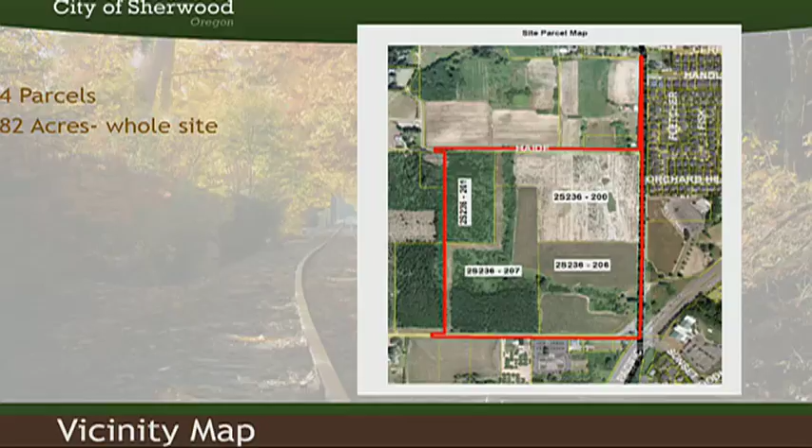Can you hear me okay? Sorry, we were discussing this, and other people may be discussing this as well, especially those at home. The projector is not working. The audience can see the PowerPoint presentation on the screen in front of them, and the commissioners can see it on the screens right in front of them, so it's really just us that are not seeing it, but the Planning Commission is seeing the presentation, even though the projector isn't projecting.

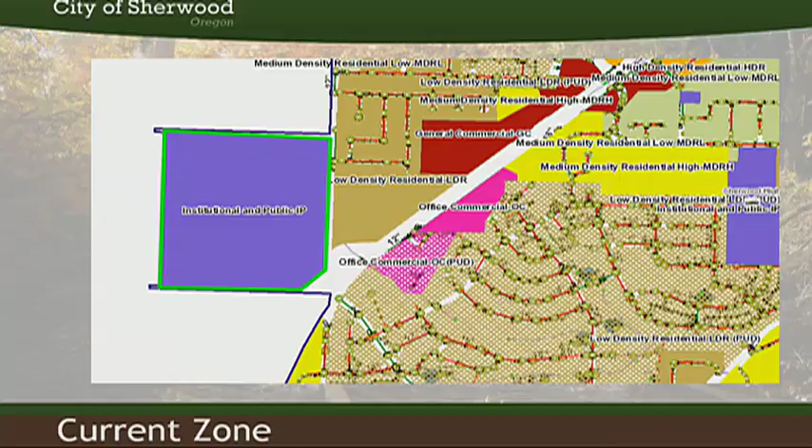The project site currently has zoning of institutional and public.

Each time we've come before the commission with different pieces of the high school, we've tried to show the larger picture and put all the different pieces together so you can see where this particular project fits in. It's particularly pertinent with two new planning commissioners here tonight.

Let me walk through those real quickly. The very first step was the expansion of the urban growth boundary around the outside of the city, which happened via Metro in mid-2017. The second step was to apply comprehensive plan land use to the site and policies, to pre-apply zoning, and to have a Title 11 Metro concept plan applied to the property. That happened already in late 2017.

The third step was the annexation to actually bring the project into the city. At that point, zoning was actually applied to the property, and that happened in early 2018, earlier this year. The last step is, and has always been, the site plan and a conditional use permit for the project. When the applicant came forward with the applications, they added a variance to that, but it's essentially what we have before us tonight. So let's dig in a little bit more with the first item.

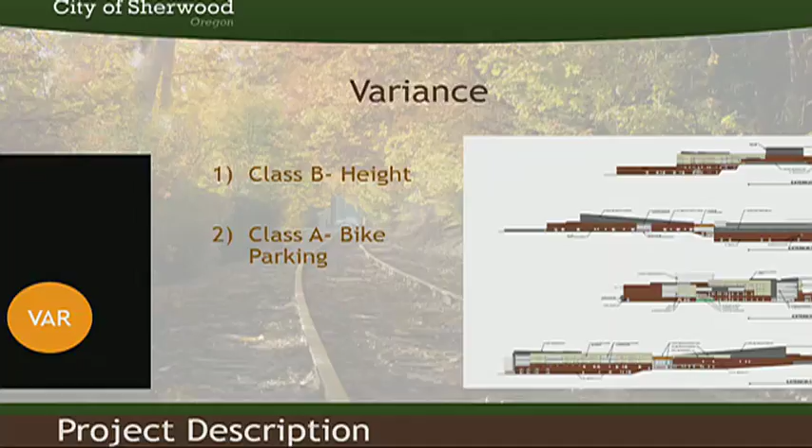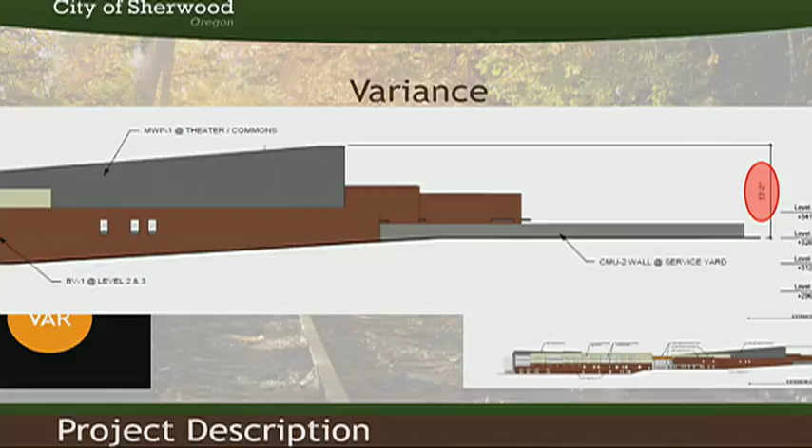The variance is twofold here tonight. The applicant is proposing a Class B variance for height and a Class A variance for bike parking. Specifically for the height, you can see on this slide that one of the structures exceeds the 50-foot height limit for the institutional and public zone by 3 feet. We'll talk more about these variances in a moment.

This isn't the right slide. I apologize, I'm experiencing a small technical difficulty. I think I grabbed the wrong presentation. Want me to run upstairs and grab the correct one? Okay, sorry about that. Did you want to start with the applicant's presentation then? No, I'll be right back. Sorry, we can pause for a moment.

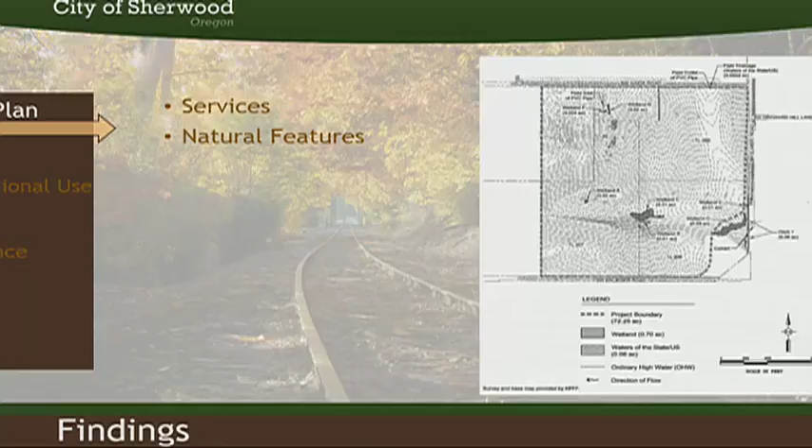The code requires that a transportation impact analysis be provided for the project. The applicant has provided one of those, and that was in the packet distributed to the Commission previously. All the proposed mitigation measures from that transportation study have been included in the project as conditions of approval.

The code requires that specific design features be used, or it allows the applicant to come forward using the Planning Commission as a design review board, and that's exactly what the applicant is intending to do. Rather than subscribe to a laundry list of prescriptive items from our ordinance, they've elected to come before you with the design features, so those are going to be to the satisfaction of the Commission here tonight.

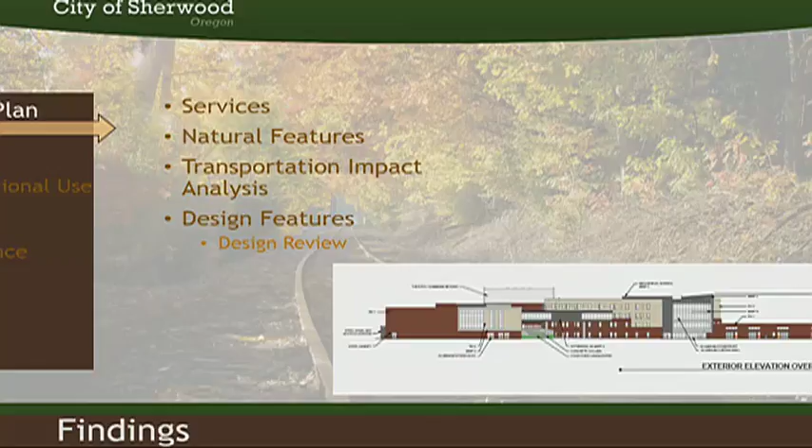The conditional use criterion includes the same requirement that services be available, so we've already addressed that. It requires that the zoning standards be complied with. In this case, the zoning standards for the institutional and public zone are all adhered to for this particular project.

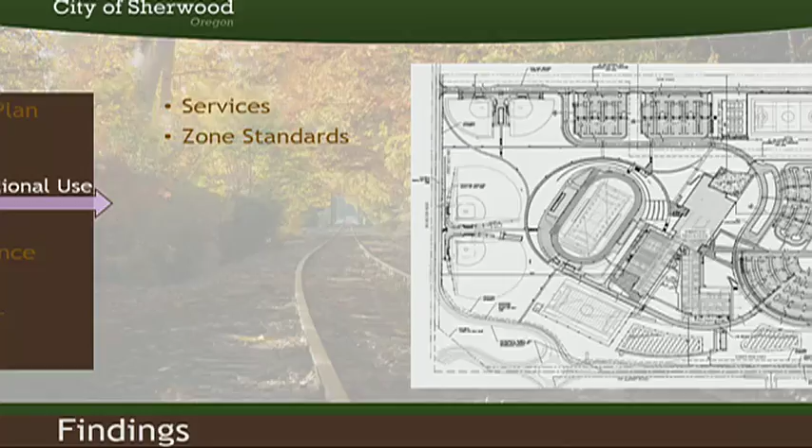The code requires that the project meet a need for the community and that they meet the requirements of the comprehensive plan. Because this project came in before, just a few months ago, with comprehensive plan changes and a Title 11 concept plan, those changes were specifically tailored for this high school.

The code also requires that there be no adverse impacts to the surrounding community. In this case, that's generally traffic. With mitigation from the transportation impact analysis and through the basic design of the school, this criterion is met.

Moving on to the variance, the Class A and Class B variances have different criteria. So we'll start with the Class B variance. A Class B variance must be based on an issue brought on by the lot, by the property itself. In this case, the Class B variance is for the height.

Based on the topography of the site, the applicant has designed a structure that is designed to basically hug the site and contour to the land. That's a requirement that comes from a lot of other sections of the code. So breaking that by 3 feet, we find that's consistent and meets the required criteria because it's based on the property itself.

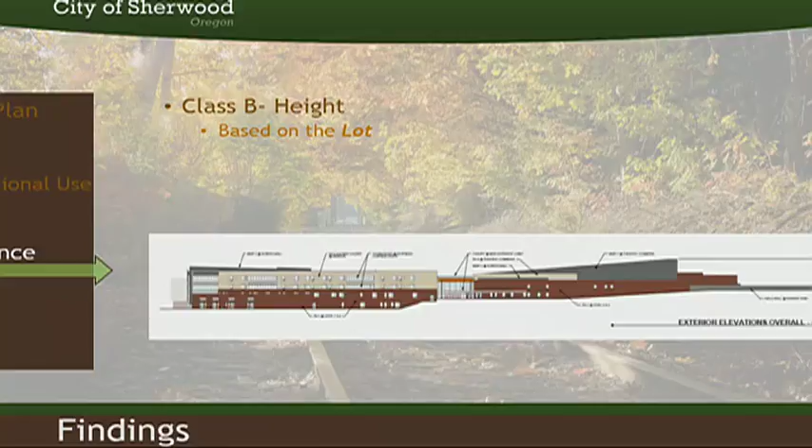The code also requires, however, that the variance be for 3 or fewer parcels. As was previously pointed out, this project has 4 parcels. The applicant was previously entertaining the idea of merging all these parcels into one, so we've added a condition of approval here that they have to do that in order to meet this criteria.

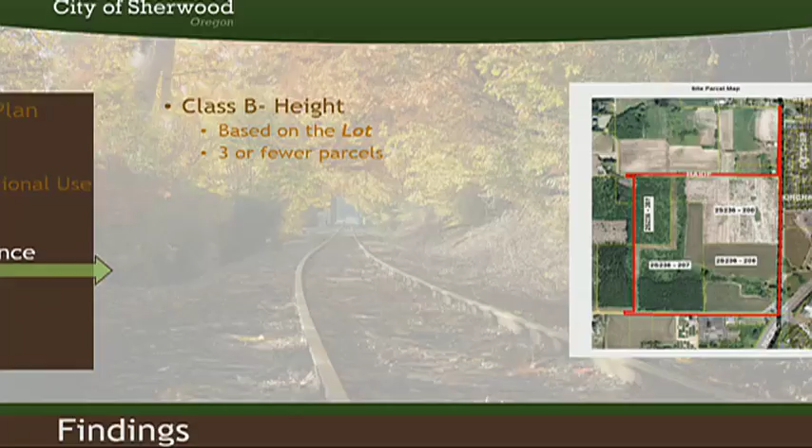The code also requires that the variance have minimal impacts, that's the actual item that has been varied have minimal impacts. In this case, the specific place where the height breaks the 50-foot height limit is located in the middle of the project, so there won't be any adverse impacts to anybody surrounding the project site based on that variance.

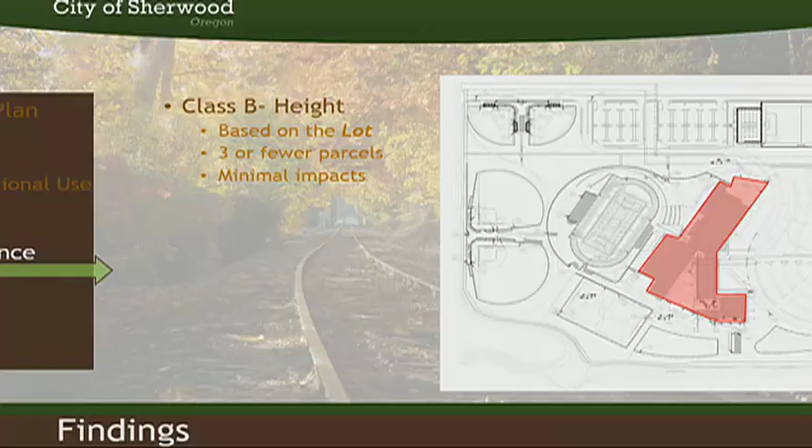The Class A variance is requesting a 70% reduction in the required bike parking. Staff at this point does not support the reduction in bike parking because the proposed change can't meet the required criteria. We've added conditions of approval that require all required 268 bike spaces, including the 80 covered bike spaces, to be added to the plan to assure consistency with this provision of the code.

More specifically, the code requires that the variance not be detrimental to the purposes of the code, and in staff's interpretation, the purpose of the bike code section is to make sure you have other options besides just cars. Reducing the amount of bike spaces obviously reduces the intent of that section of the code because there's less bike spaces to be had. So we feel it is detrimental to the purposes of the code.

Additionally, the variance must be based on a hardship brought on by the lot or the property or the land - topography, a stream going through the middle, rock outcroppings, something like that. Basically, it's designed as a feature of the land that is creating the problem.

In this case, the applicant has indicated that the location of the site is the hardship, and the location, according to staff's interpretation, isn't necessarily a feature of the land and therefore can't be used to satisfy the criteria for a variance. The narrative additionally argues that primarily the code requirement is excessive, and staff feels that if the code is excessive in that realm, which it may be, the appropriate way to address that would be to fix the code. You can't address that through a variance because the variance is rooted in the land itself, and the discrepancy or excessive requirements of our ordinance don't come from the land - that's coming from the ordinance - and therefore it can't meet this criteria.

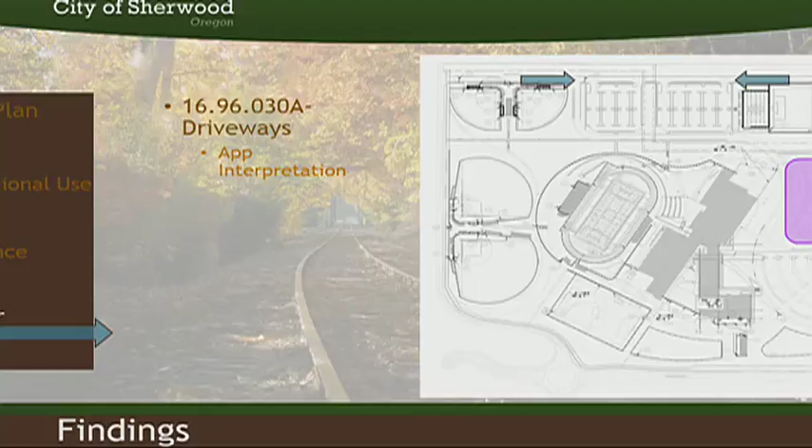Now, the applicants have interpreted this section of the ordinance differently from staff. The applicants have interpreted that the project, if it has more than 50 parking spaces, has to have more than one point of access, and in that case it meets the requirement in spades because there are several points of access to the project site.

Staff has interpreted this a little differently—that each parking lot over 50 spaces requires 2 points of access. If that's the case, the staff parking lot only features 1 point of access.

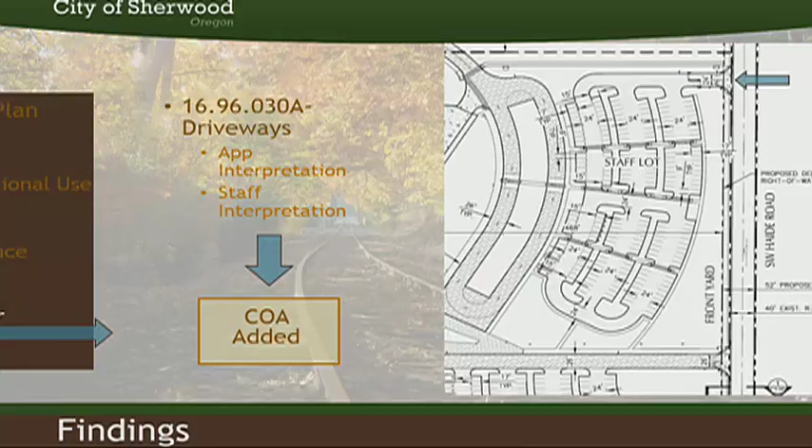So to address this, we've added a condition of approval saying that parking lot has to be redesigned to include a secondary point of access when they come in for the final site plan. If the Planning Commission should elect to agree with the applicant's point of view, we can simply drop the condition of approval, and then that criteria is met.

Section 16.10.620 includes a litany of transportation standards and requirements. We're not going to go through all those individually tonight because the transportation impact analysis addressed those standards in spades, and the applicant's team has an entire presentation addressing transportation and traffic, so we're not going to double up on their efforts. But I do want to note that in staff's opinion, this project meets all of those standards and criteria.

Last, the code requires street trees, and this project is being constructed through a fairly complicated and elaborate structure of intergovernmental agreements—the applicants will be building some streets, the county will be building other streets, the city might be doing some of the improvements also.

So we wanted to clarify in a condition of approval that it's still the applicant's responsibility to ensure that all the required street trees are built before the project is open, regardless of who builds them or how they go in.

So with that, staff recommends approval of the project shy of the variance we discussed previously, subject to the conditions of approval. Before I leave my presentation, we handed out a memo to the Planning Commission, and there are extra copies for any member of the audience at the back of the room.

We've continued to work with the applicant after release of the staff report to address some of their concerns regarding the timing of some conditions of approval, specifically related to grading. So we're proposing some clarifications and small modifications to a number of conditions of approval tonight to help address those timing needs.

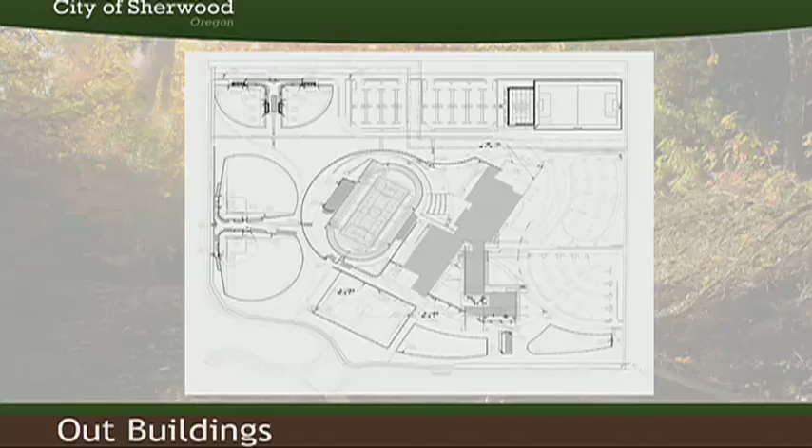How big of a barrier is between the two parking lots? Do you know? I don't know. Would an emergency ingress and egress be allowed? Because I assume you want two, so emergency vehicles can cut across if there's a need for that, in case one's blocked. Sure, well the code doesn't get that specific. It just says that if you're over 50 spaces, two points of access are required. That's all it says.

So we were just putting the burden back on the applicant to design how they would meet that. Okay, so potentially they could come in and clarify that the secondary ingress and egress on the staff parking lot could be limited to an emergency access using the bus turnaround, and that would be acceptable if the condition allowed it. I would think so. Those are the two quick points I had.

And if I may, on the variance and the location—just as a reminder, this is now surrounded by urban reserve, and so it certainly is not anticipated that over the life of Sherwood it will always be rural. There will likely be, over time, neighborhoods and developments around it.

Well, that sort of goes to the other issue—you keep referring to the Sherwood West concept plan, but didn't the city council just say we don't want to do that?

No. There's the Sherwood West preliminary concept plan that exists, it's valid. What council recently said they didn't want to proceed with is asking Metro to add a portion of that into the urban growth boundary in this current round.

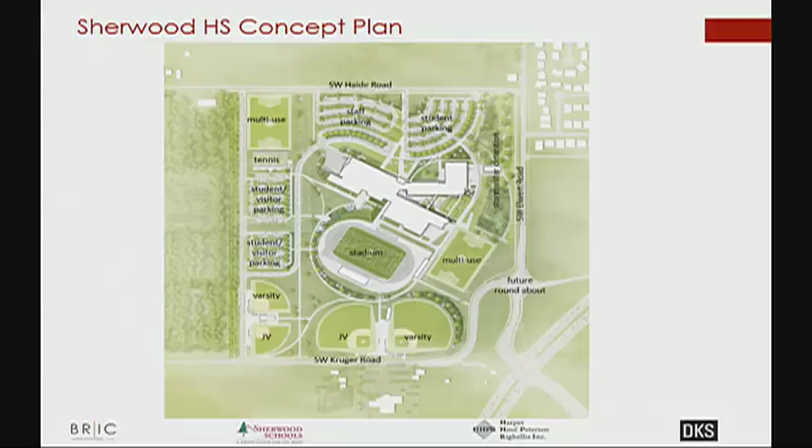The other elements you see in front of you, as Matt also pointed out, we have 4 parking lots. We interpret the code as essentially asking us to look at on-site circulation. It never specifically says each driveway has to have that, so we have a number of on-site access points to the parking lots. Commissioner Cottle, the statement you made is exactly right.

The core tenet of our site development in terms of on-site circulation is to separate bus circulation from vehicular circulation. The buses enter on Kruger and take their own dedicated lane for a bus drop-off around the front of the school, isolated from a staff parking lot to the north and a student parking lot to the east, with parent pickup and drop-off, plus two separate student parking lots and visitor parking lots on the western side of the site.

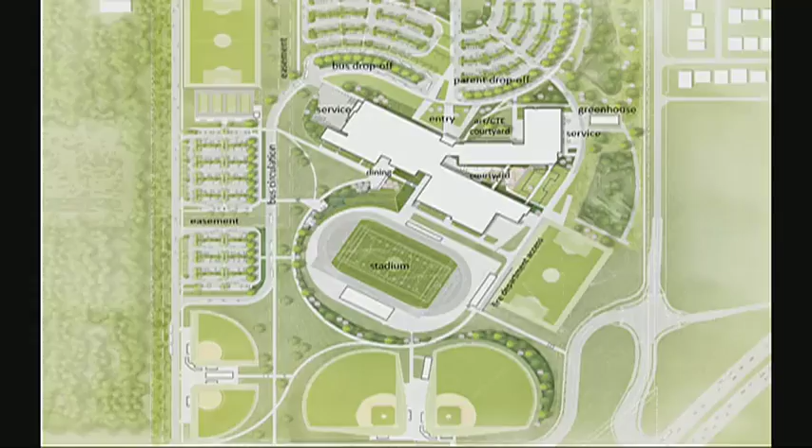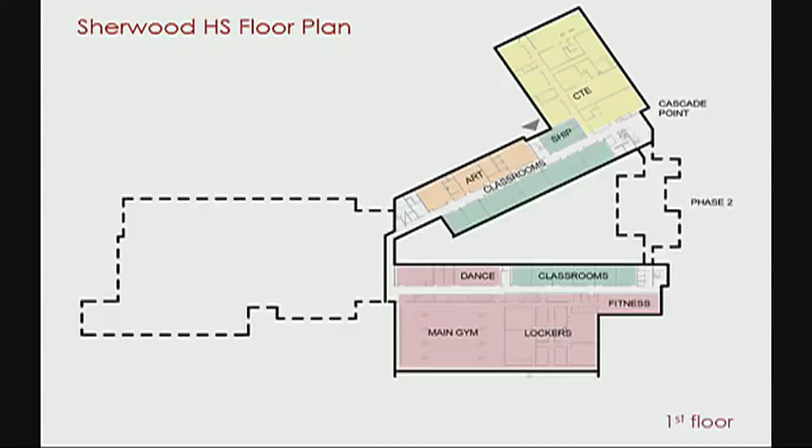You see throughout the site a series of site features. I won't go through the building in great specificity in the interest of time, but it's a 4-story building. We always like to start on the 2nd story because that's where you enter the site, at the main lobby, and you can see in dashes the areas of the site above where you are. Then you go down to the lower level, which houses mostly the athletics and career technical education spaces.

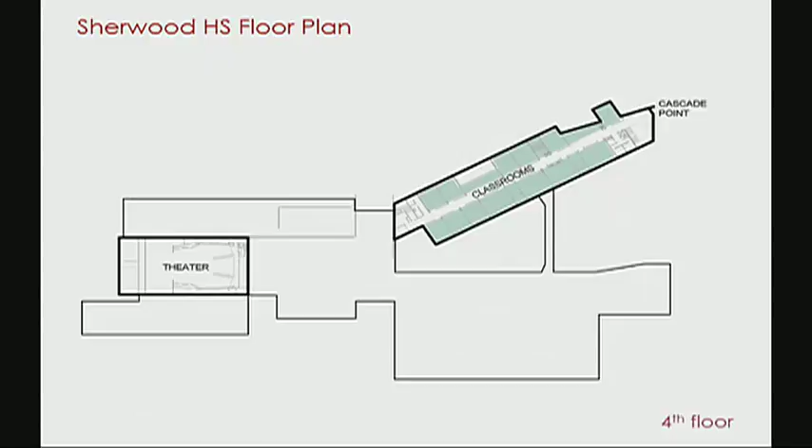Bypassing the 3rd floor up to the 4th floor, you start to see where the common spaces and theater spaces take the top part of the site. Really the only portion of the site that maintains its footprint from the 1st floor to the 4th floor is the classroom wing that culminates at Cascade Point at the northeast corner of the building.

Matt did a great job walking you through the exterior elevations. Our purpose tonight is to come before you for a design review of a building we think is in keeping with the character of the Sherwood community. One comment we heard early on, both internal to the district and from the community, is an interest in making this feel as residential in scale as a building of 342,000 square feet could be.

In contrast to more urban experiences where the building is right up against the property line and you go from a sidewalk to 4 stories tall, we made an effort to move the building back as far as we could and have it hug its way up the site. You start to see materials indicative of the Pacific Northwest, masonry and wood primarily, and an abundance of glazing to allow natural light into the building.

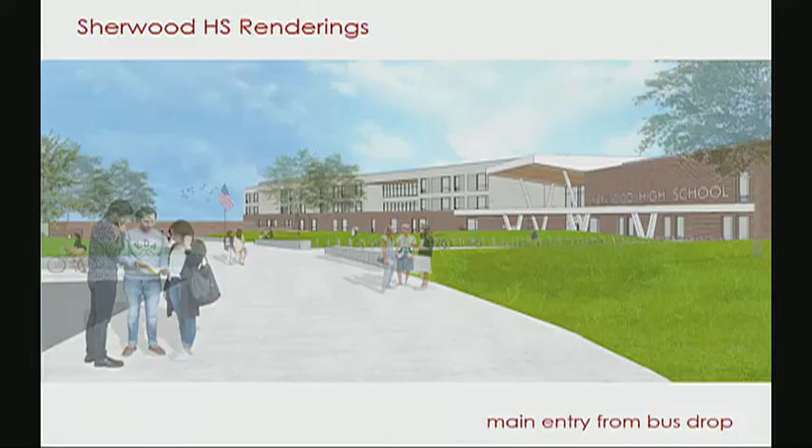The rendering in front of you is the main entrance coming from that standalone bus drop. As you work your way closer to the main entry, you start to see those elements again, the masonry and the wood, that greet you as you walk through the front doors.

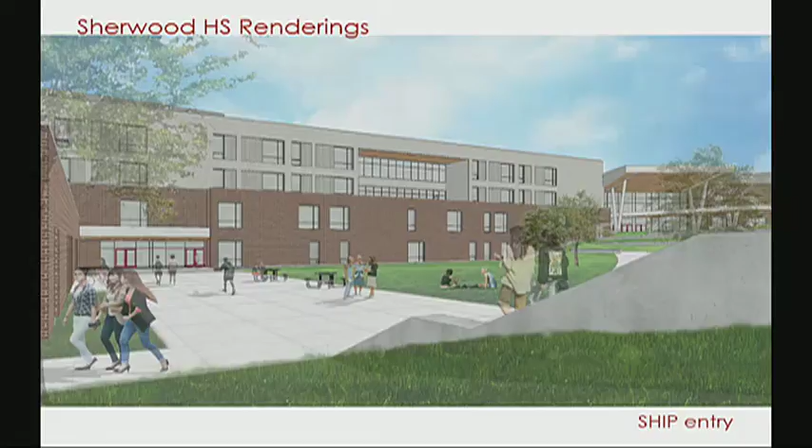Working your way further east, you start to see that grade change. The entry we were just talking about is on the right-hand side of this rendering, and it's about 15 feet above the entry level here at the lowest part of the site at the first floor elevation.

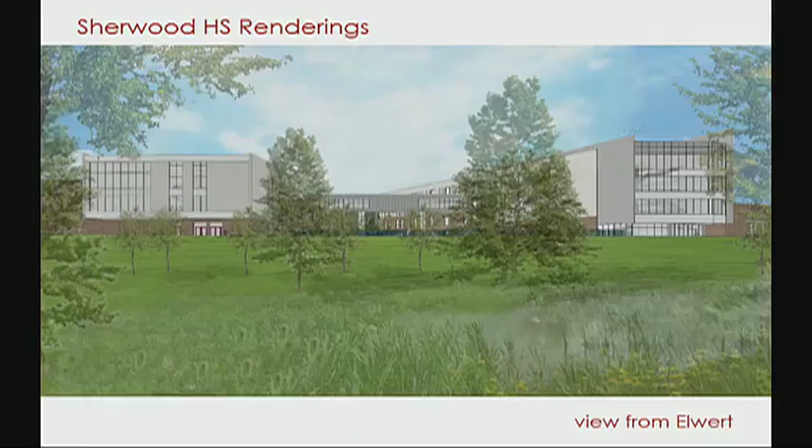This view would be from within the site, basically from within the stormwater detention features we're required to have, looking back towards the library on the left side of the site and the classroom wing on the right, with a view through that corridor that links to the courtyard with a sky bridge connecting the building at the third floor. Moving further into that courtyard, you start to see again that the character of the materials is consistent throughout the building, trying to break up the massing so you're never seeing the same material go all 4 stories.

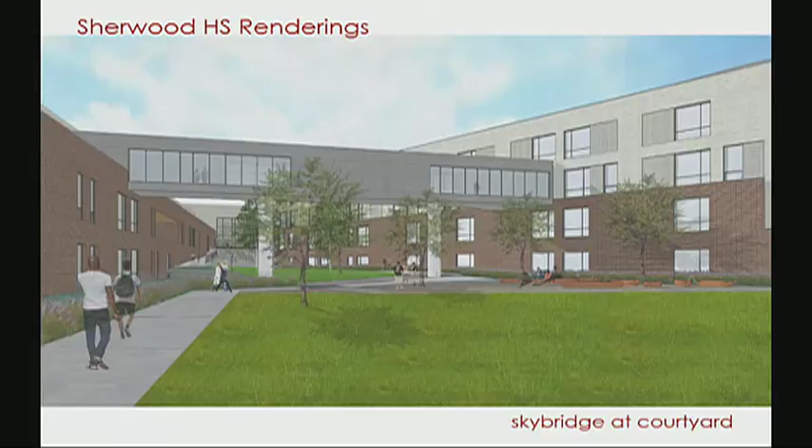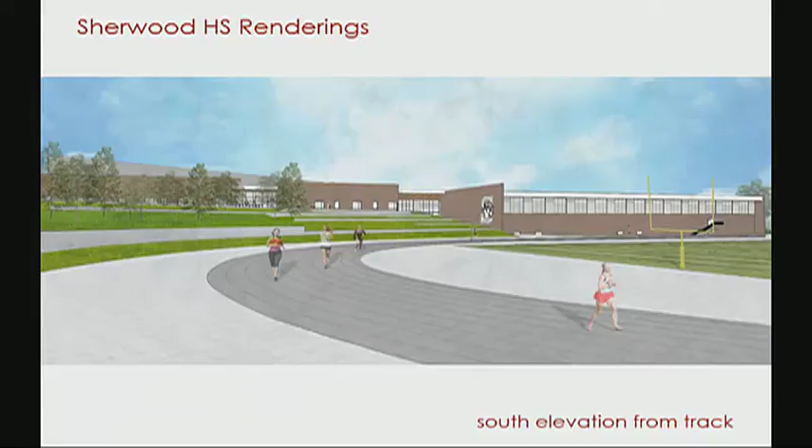Finally, looking at the south elevation from the track in the stadium, trying to get a picture of what that performing arts center, which you're seeing in the background on the left-hand side of the slide, and the gymnasium on the right-hand side of the slide.

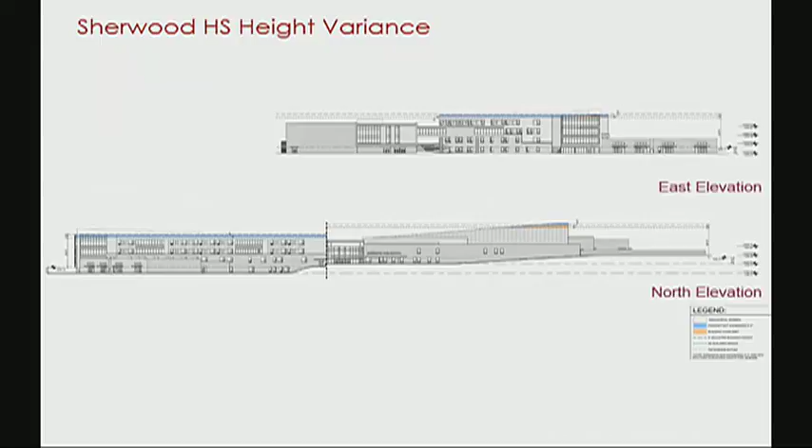So I wanted to talk about the height variance. These are elevations that we provided as part of the packet that are incredibly hard to read at the scale, but really what we're trying to indicate is by color both areas where we have mechanical screens, which don't count against the height variance, and then areas in orange where you can see we do exceed the requirements, but certainly well under, I think it's the 5% or 10% that is the limit for a type B variance. You can see that on the rest of those elevations as well.

And then looking across Elwert, which is where we are closest to our neighbors, we're still over 360 feet away from our neighbors in that case. So we think that while a building of this scale is difficult to mask relative to a site like this, by allowing it to step its way up the hill, we've done as good a job of that as the site would allow us to do.

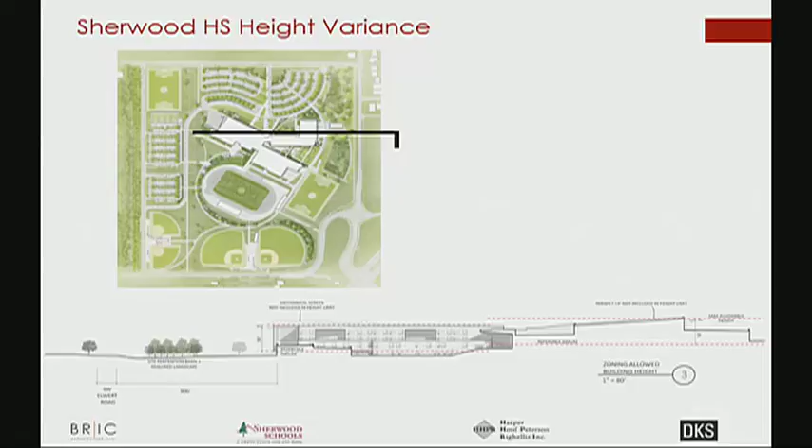So with that, I'm going to hand it over to Scott Mansur from DKS to talk about the traffic.

Thank you, Karina. Again, I'm Scott Mansur with DKS Associates. I'm just going to tilt this a little bit.

I'm going to walk you through the transportation impact study that we prepared for the school district. This is actually the third study we've prepared for this site. As Brad talked about earlier, we originally had a traffic study done for the UGB expansion. Then we had a second study as part of the zone change and comprehensive plan change, which had conditions of approval for traffic that I'll talk about later. And now this is our traffic impact study for the site development.

Just to show you the magnitude of the traffic study, we analyzed 19 intersections, many of which were under ODOT, Washington County, and City of Sherwood jurisdiction. We had 3 public agencies that we coordinated through this process that reviewed our traffic analysis and provided feedback throughout: ODOT, Washington County, and the City of Sherwood.

We've had a lot of coordination meetings through this process—probably a dozen meetings throughout all 3 studies. For our site development, the 3 most recent were back in March, April, and May, where we presented our findings, received feedback, made revisions, and came up with a set of transportation solutions that all agencies and the school district were able to agree upon. Many of the things we coordinated were background traffic growth assumptions, trip generation assumptions for all the different school modifications and changes through the bond and the study area, and many more.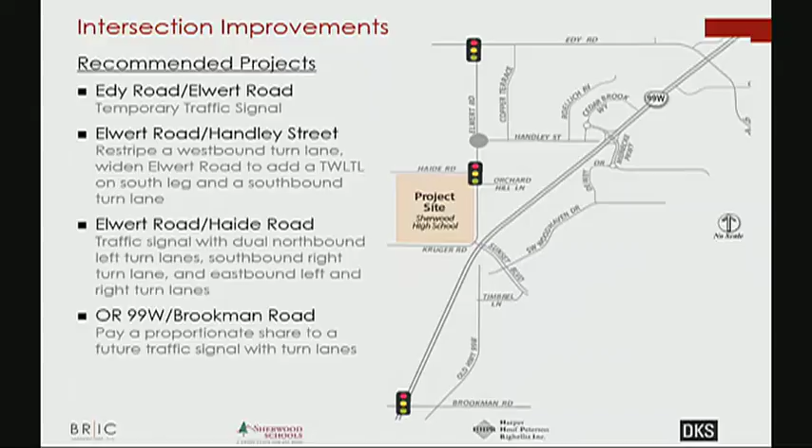This figure shows some of these improvements, including the temporary traffic signal at Edy Elwert. We're also proposing a southbound left turn lane on Elwert at Handley, and a left turn lane exiting Handley to improve capacity, so widening at that location, as well as at the Haide Elwert intersection, with dual northbound lefts from Elwert to serve the morning peak of about 500 students who want to turn left there, as well as other signal and transportation improvements for pedestrians and bikes.

And this is showing our two TPR conditions, which were part of our transportation planning rule: widening Elwert to 4 lanes and building a multi-lane roundabout at this location. Something that isn't shown is the city is also planning to mirror the improvements for 5 lanes on the Sunset approach to that signal.

As well as you can see, there are pedestrian improvements on 99, some pedestrian medians, and dual left turn lanes on the highway coming northbound. And this is my final slide.

Just to go through, these are all the mitigations being recommended, what the improvement was identified as, whether they are frontage improvements, part of the Safe Routes to School plan, required by the land use plan for operations, or the TPR study. And as you can see, across all the studies, the district is recommending about $12.5 million in transportation improvements to be constructed.

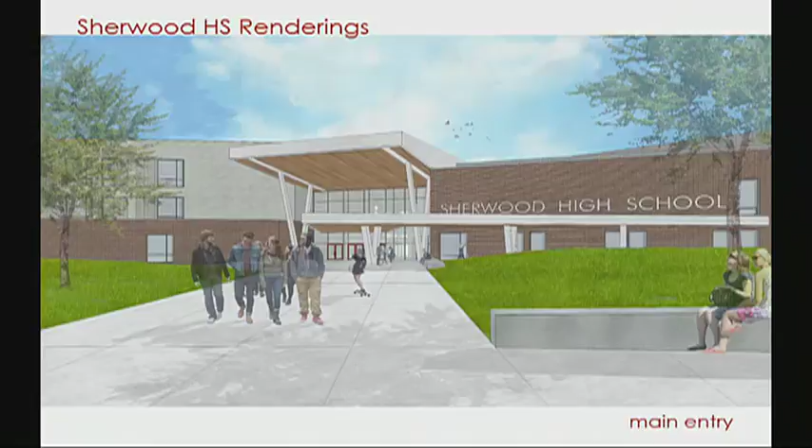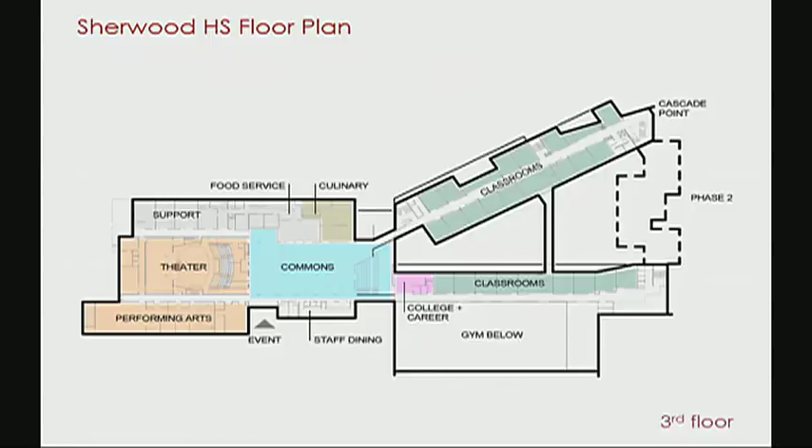How many classrooms does phase 2 include? Oh, now you're asking me to recall a program. I believe phase 2 includes 22, but I may be speaking out of turn. It's three levels, three stories, with a combination of general education classrooms as well as a makerspace or large flex career-tech education space as part of that. So will it need that much more bike parking at that time?

No, however that would be a major modification. We would be coming back to the Planning Commission for approval of that addition. We'd be looking at parking, we'd be looking at traffic - that would trigger a significant review. Hopefully. I would ask that you do a code amendment for bike parking between now and then, but yes.

Does that essentially close it up into a triangle, creating a courtyard? It would enclose a courtyard. There are places where we would have access for emergency egress, but yes, that would be the intention. And then the other question was - your application is for 2,000 students.

So what if you get to 2,010 students? Because once they hit 2,000, I assume the school doesn't want to be cut off, so can we put a plus or minus there? The condition is actually for the built conditions to accommodate 2,000 students, in the same way that the capacity of the existing high school is 1,550 - and currently there are well over that number of students in there.

The design itself is designed to accommodate 2,000 students. That isn't a capacity issue. So there's not a capacity issue, because I thought the first condition was for 2,000 students. I just want to make sure that we're not hung up and somebody makes a complaint saying you've got 2,010, you've got to go get a new conditional use.

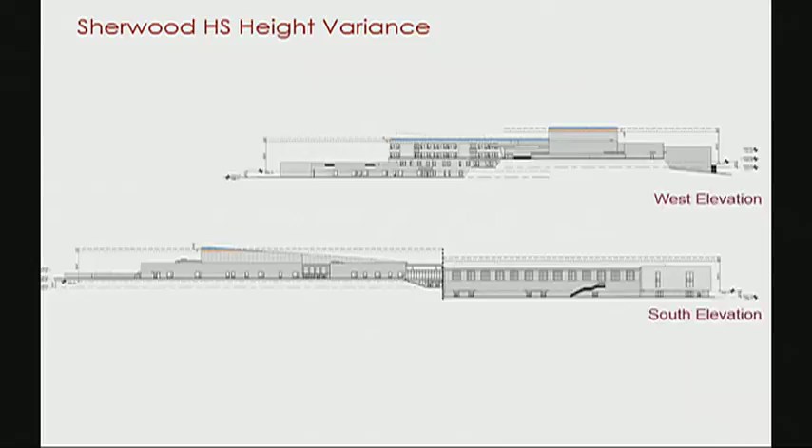All right. Can you move your slide to the one showing the intersection of Sunset and 99? Sorry, I'm trying to get there. There you go, that one, right.

Okay, so this was kind of sped through really quickly in the original presentation, and I just want to hone in a little bit here so I understand. I realize this is a complicated intersection involving 3 different government jurisdictions plus the school district, and I understand all that.

And there was a lot of questions. I attended the Washington County open house where the public could come and provide feedback on that. Okay, yeah, but there's an intergovernmental agreement. And so, additional questions about that, so I'm clear on what's happening on the Elwert side and Kruger side.

Sidewalks or crosswalks are being added, it looks like, on the south side of Sunset. So then you're adding 2 left turn lanes onto Elwert. What is 2 left turns on Highway 99? Yeah, to Elwert. Yes, that's what I meant. Sorry.

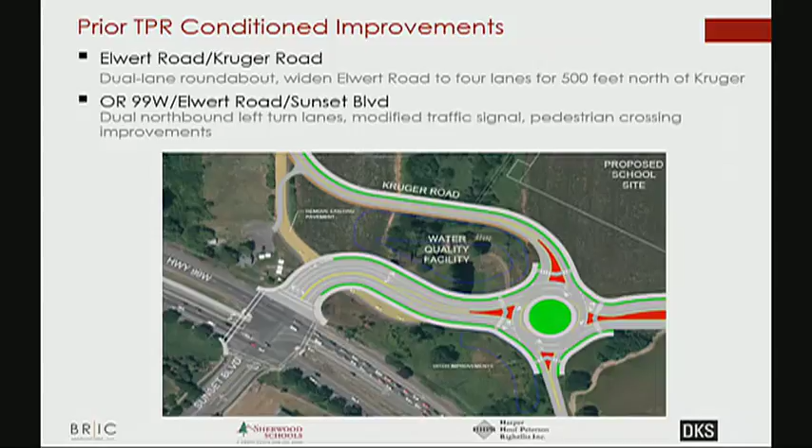At this point in time, we're starting up. It's going to be the city project. Okay, so Sunset, the actual intersection of Sunset with Highway 99, which is the opposing side of Kruger and Highway 99, the city will be performing that. We're going to basically mirror what is needed on the Sunset side, so we're going to take care of that aspect of it.

So it's 5 lanes, a left turn lane, and then your question was there'll be 2 through lanes on both sides going. So there'll be 2 from Elwert across to Sunset, correct, and 2 straight through from Sunset across to Elwert. Correct. And will that happen before occupancy? Yes. Okay, the city's portion of it.

That also. Well, if this all merits 5 turning lanes, why isn't there a deceleration lane or an acceleration lane on 99W for it? That is because ODOT dictated that would be that way. So yeah, but you don't argue with them on that one. They are controlling what we do as far as that's concerned, and they have their numbers that support it. And they and their numbers also support not doing anything to 99 or I-5 and blah blah blah.

Well, that's beyond the scope of this one. Okay, I was just curious.

But just to be clear, this work by the city will be done before occupancy. It'll be done in conjunction with the rest of this work. It has to be, for the intersection to work properly. I agree, this is the first time I've heard that commitment in all of this process. And it's in our budget, it's already in our budget. We've already started it.

If the city decides to put in an overpass, is there enough land to put an overpass bridge to get the kids from one side to the other on a pedestrian path? I could not answer that at this time. I have not studied anything relative to that. That is something you would have to take up with the city council or other people.

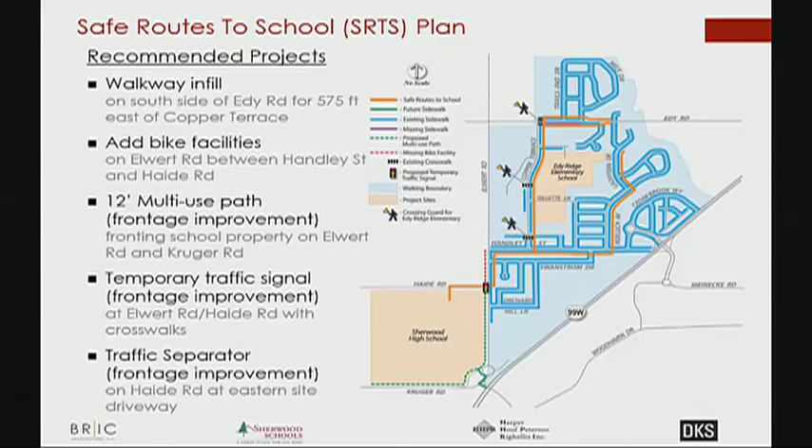What do you mean, that's Rob. Okay, well, I would recommend - I don't think it's necessary, but I totally understand it, because we dealt with Tualatin-Sherwood Road and the theater, and that was complicated. So a general condition that just says something as simple as: the light at Haide is understood to be temporary until such time as a traffic signal on Handley is installed, at which point the signal at Haide will be removed, and Haide will be a right in, right out. Period. That's all - I want, in the future, for us to have something to point to.

So we're adding an A2 general condition regarding the temporary light at Haide. And maybe, channeling the school district here, maybe we even specify that it's a county or city project or a public improvement project, so that there isn't any burdening question in the future that they're on the hook for it. Yeah, they're not on the hook for taking that light out.

So we'll expect when it goes right in, right out, everybody will be using the roundabout to get through? No, they'll use Handley. Yeah, the vision is that there'd be a light at Handley, and then Handley would connect to Haide. Handley's going to basically do like a crossover and connect down. Yeah.